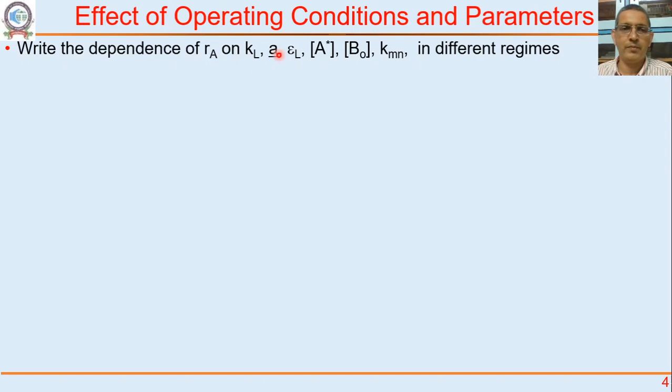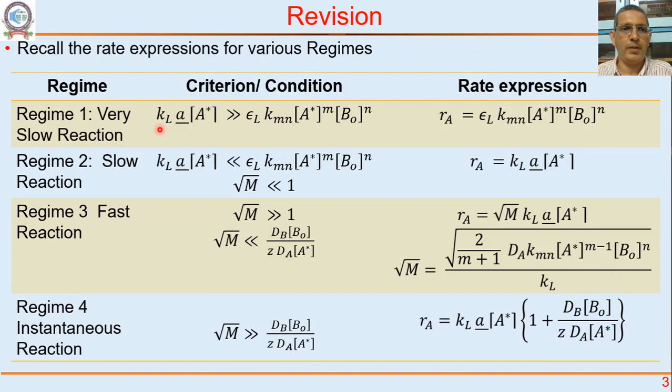So if you write regime 1, regime 2, let's pause a little bit. Think about this - regime 1, what is regime 1? Look at the previous slide. Regime 1, this is the rate expression.

So in regime 1, rate does not depend on KL, rate does not depend on A bar. Rate depends on epsilon L, proportional to epsilon L. Rate is proportional to Kmn. Rate is proportional to A star raised to M. Rate is proportional to B naught raised to N.

Regime 2 depends on KL, depends on A bar, depends on A star, does not depend on epsilon L, does not depend on Kmn, does not depend on B naught. Regime 3, regime 4.

Question that I want to ask you is, why should we know in what regime the reactor is operating? If you are analyzing performance of a given reactor, then we should know where it is operating. Otherwise, how do we improve the performance if I don't know in what regime it is operating?

For example, if it is operating in regime 2 and we want to improve the performance, you might say there's a reaction happening, let's increase the temperature, rate constant will increase. But if it's in regime 2, it is not at all dependent on rate constant. A star changes little with solubility, in fact A star may reduce with temperature. KL may increase slightly with temperature because of diffusivity. So the effect of temperature is going to be very weak in regime 2, it may even reduce performance.

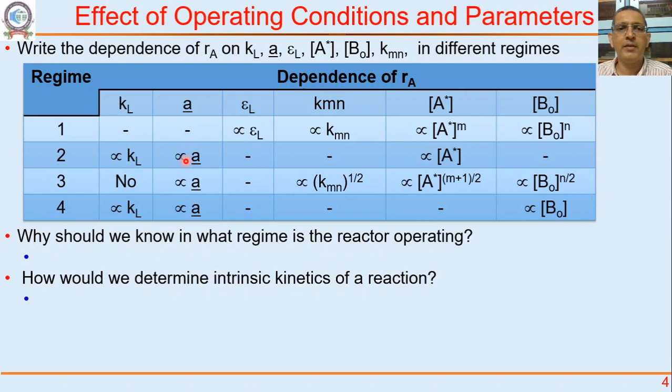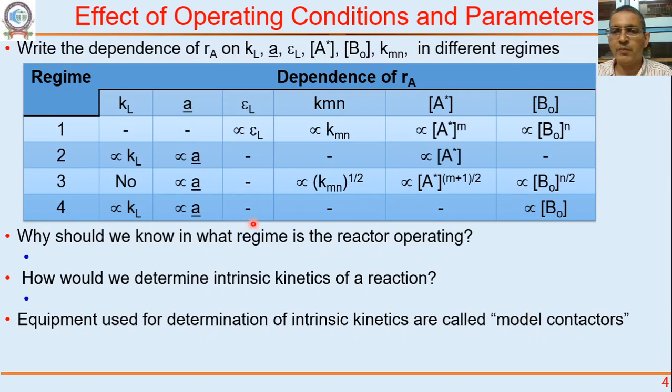So now what equipment should we use? The equipment should allow us to measure KL separately and A separately, and it should also allow us to vary the mass transfer coefficient so that we can come to regime 1 or regime 3. These equipment are called model contactors. We are going to spend some time on these model contactors.

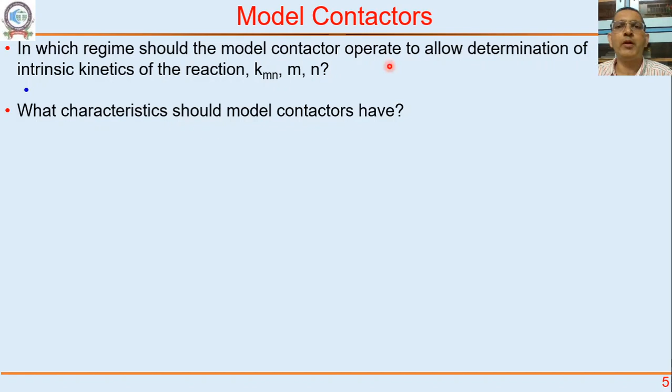So this is what we have seen. In which regime should the model contactor operate to allow determination of intrinsic kinetics? Regime 1. What characteristics should model contactors have? They should allow determination of KL directly from hydrodynamics. Equipment that does this is called laminar jet, wetted wall, or wetted sphere.

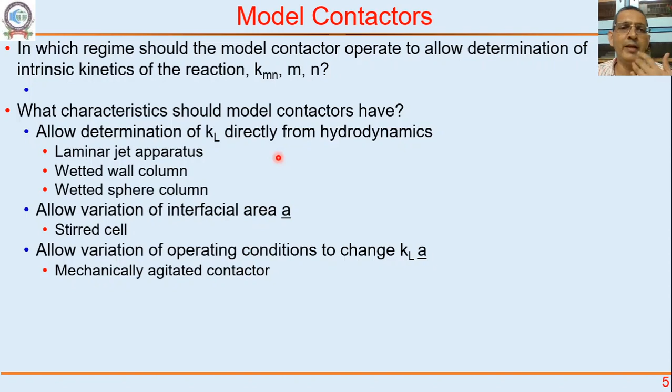They should allow variation of surface area, interfacial area - stirred cell. They should allow variation of operating conditions to change KLA. The model contactor that does this is called a mechanically agitated contactor. We'll see examples of all of this and we'll see how this is actually achieved.

With an increase in KLA, I would like you to plot how RA would vary with KLA. We have done this in the last lecture when we varied KLA - go back to the last lecture if you want. If KLA is very small, we are in the mass transfer control regime. But as I increase the mass transfer coefficient, reducing the mass transfer resistance, it slowly shifts to the kinetically controlled regime, and then we are in a kinetically controlled regime here.

So anyway, it is drawn for you. If reaction is in regime 3, we'll get falsified kinetics - recall.

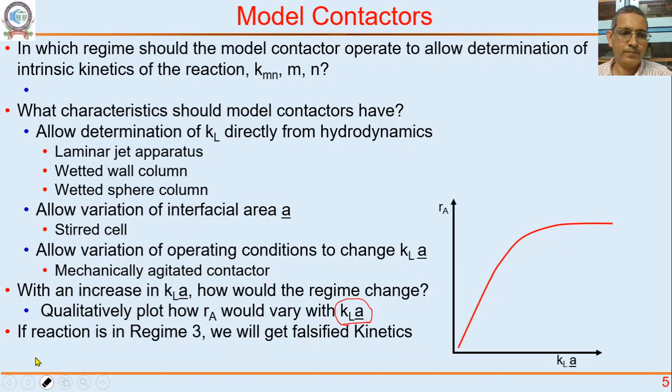So what information do we need from the laboratory? We need to eliminate all mixing and mass transfer issues, so high RPM - the result should be independent of RPM because KLA depends on RPM. Turbulence and dispersion, interfacial area depend on RPM. We also need kinetics of the reaction, meaning we need the rate constant, we need the order - that's the intrinsic kinetics. But we also need heats of reaction.

Reaction could be exothermic, and we have seen in the early part of our syllabus what happens when heat of reaction is there and how temperature rise can create problems for us. We need solubility, Henry's constant, that allows us to determine A star. We need vapor liquid equilibrium because the solvent may have a vapor pressure. Our B may vaporize, or the solvent used to dissolve B may have a vapor pressure, so that will decide your partial pressure of A.

If it's a liquid-liquid reaction, we need distribution coefficients, right? So these are the things that we need from the laboratory. Let's not worry too much about this just now. Using this information, equipment can be designed for batch and continuous plants, and we choose whichever is attractive from an economics point of view. That's how we have to do our reaction engineering, that's how we have to design reactors.

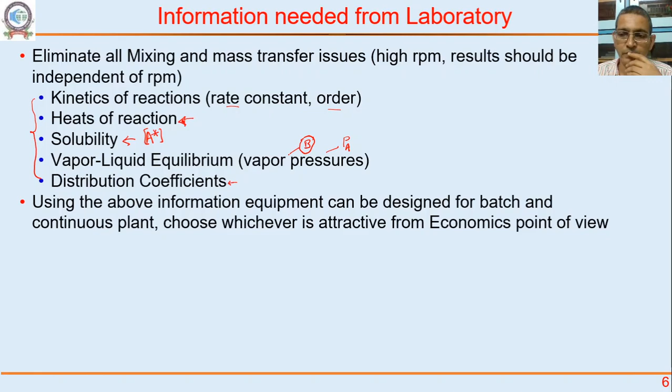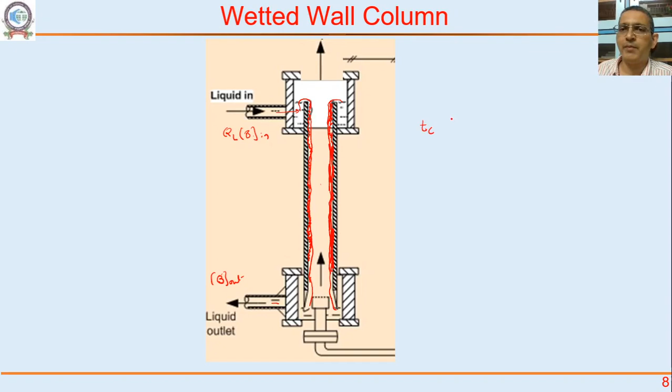Contact time is now between this falling liquid - the length of the film we know, velocity in the film we know, using Nusselt film theory which we've seen in heat transfer and momentum transfer courses. If you don't recall this, go back and revisit your undergraduate lectures or books on how to determine film velocity and film thickness for a given flow rate and wetted area. Contact time can be calculated, mass transfer coefficient can be calculated, and interfacial area is known exactly.

That's why these are in the first category - they allow determination of KL directly from operating conditions, meaning hydrodynamics, and they allow variation of interfacial area. I can take different lengths of tubes.

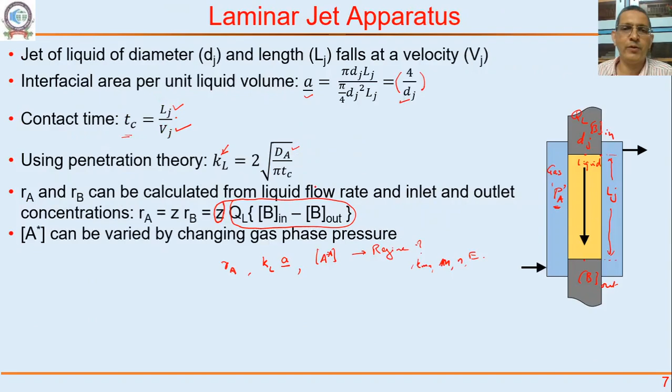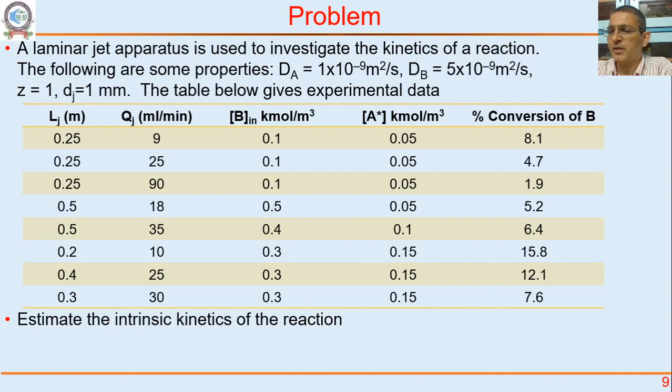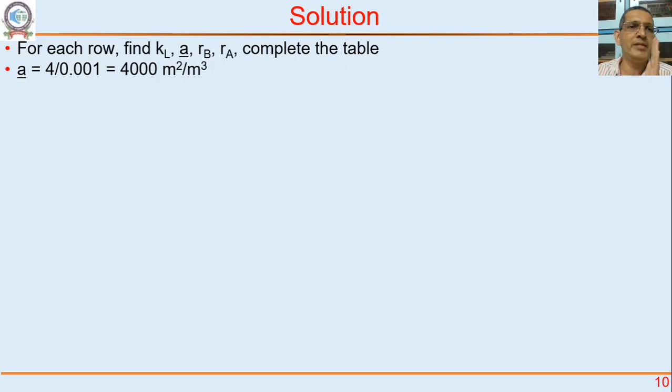For each row, find KL, A bar, RB, and RA to complete the table. A bar is 4 divided by dj, which is 4000 meter squared per meter cubed. Complete the table - do it yourself.

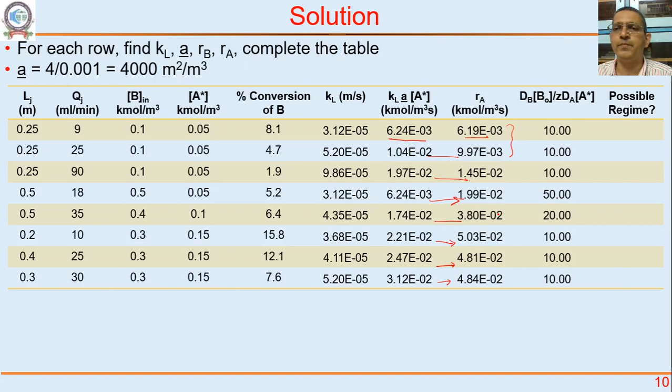How do you proceed to get the kinetics? Think about this - the answer is not provided, so that's our homework.

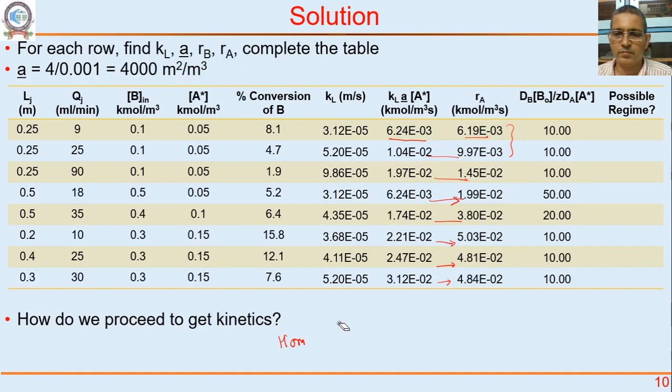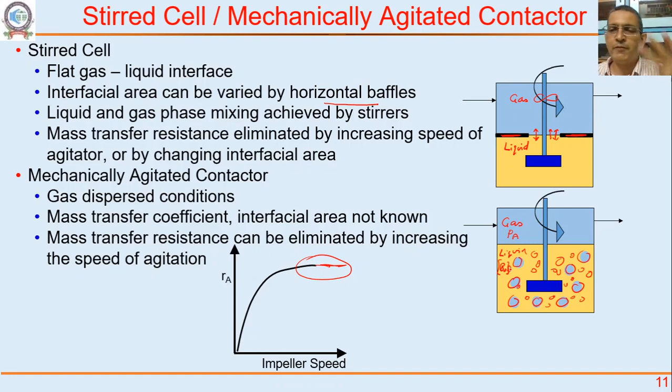Under this condition, we have eliminated mass transfer resistance, and then we can estimate kinetics in this regime by changing partial pressure of A and by changing B naught. We see how rate depends on A, how rate depends on B naught, and then we can get M and N. Do this at different temperatures, then we'll get the energy of activation.

Here is a small problem. A cylindrical stirred cell, 5 cm diameter, containing 100 ml of liquid, is used to investigate the kinetics of a reaction. Following are some properties: dA, dB, Z, A star.

The table below gives data at different impeller speeds: n equal to 0.5 rps, n equal to 1 rps, n equal to 2 rps, showing with respect to time how B naught is reducing. What is B naught? B naught is the concentration of B in the liquid phase.

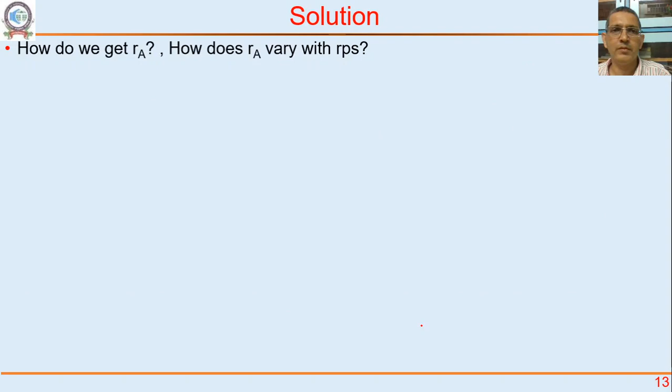In a separate experiment, the following relationship was obtained between KL and N: KL equal to 2 into 10 raised to minus 5, N raised to 0.8. How do we proceed to get kinetics? This is homework, solve it for yourself. How does RA vary with RPS?

From the variation of B naught with time, we can get the initial rate, RB, as dB naught by dt. Do that, and this will give us RA initial. A bar can be calculated from geometry. Can we calculate it from geometry? Yes, stirred cell, 5 cm in diameter, 100 ml liquid.

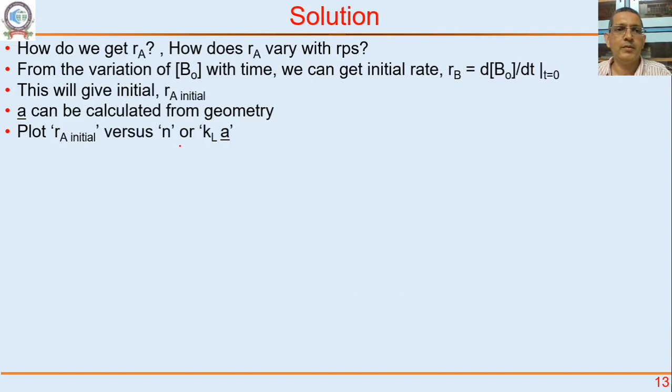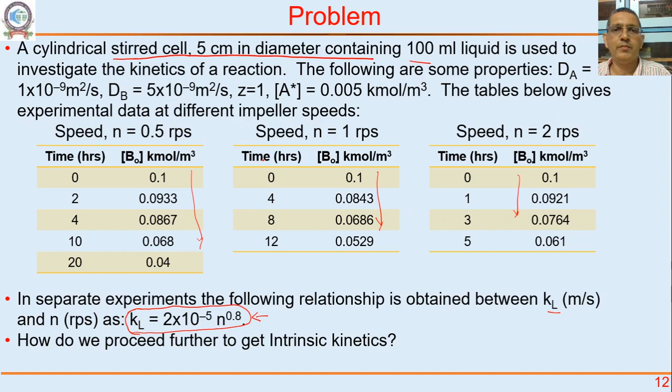Plot RA versus N, or KLA. This is how you will get R at N equal to 0.5. Use this expression to get KL, get KLA, and A star we know. This is from here, RA initial.

What do you think? KLA is higher than RA. Is there enhancement? No, KLA is higher than RA, so there's no enhancement. This is like regime 1. Now somewhere here we can operate our reactor and vary B naught, vary partial pressure of A, and get the orders and the rate constant.

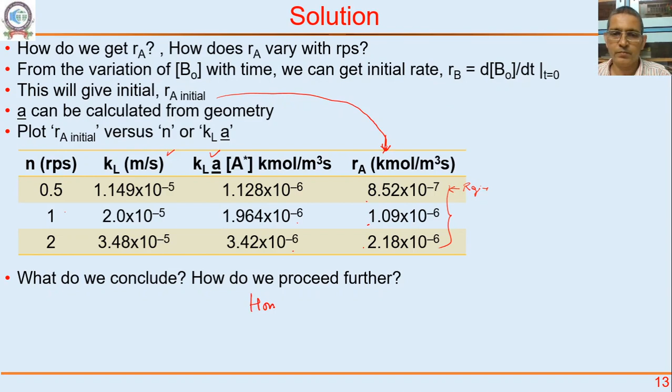How do you proceed further? This is homework. The heterogeneous reactions book by Doraiswamy and Sharma, volume 2, chapter 2, examples 1 to 5, are based on these model contactors. Study them; the book also gives solutions for some of them. Study them, that's your homework.

So we'll stop this lecture here. We have seen how model contactors can be used to identify the regime and then go on to investigate kinetics of the reaction. Why do we need kinetics? Because it is required for scale-up and for designing a reactor. Next class we will solve problems on designing reactors where gas-liquid reaction is happening. That's coming in the next lecture. We'll stop this lecture here.